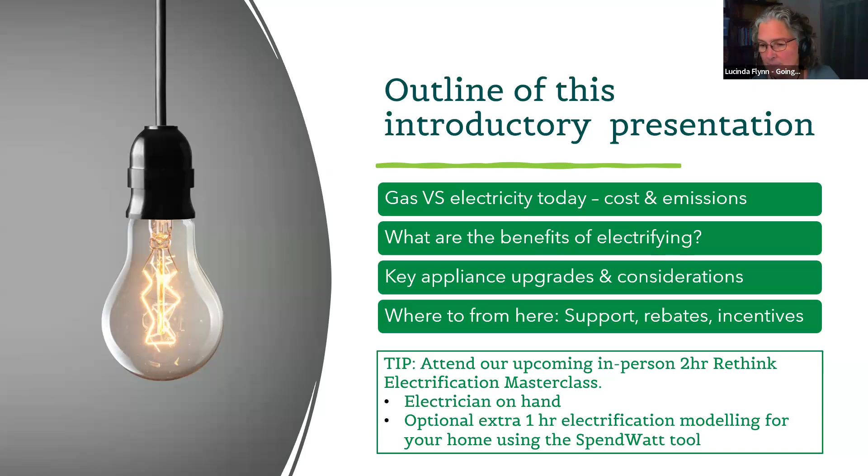All right, so cost of gas versus electricity. When I first trained to be a home energy efficiency assessor, we were actually encouraging people to take out electric things and put in gas things. So if you're confused and thinking, well, isn't gas cheaper and cleaner? Don't feel alone, because for a long time it was. So you're not wrong. It was the case, but things have changed quite a bit since then. And I'm going to try and explain briefly what has changed.

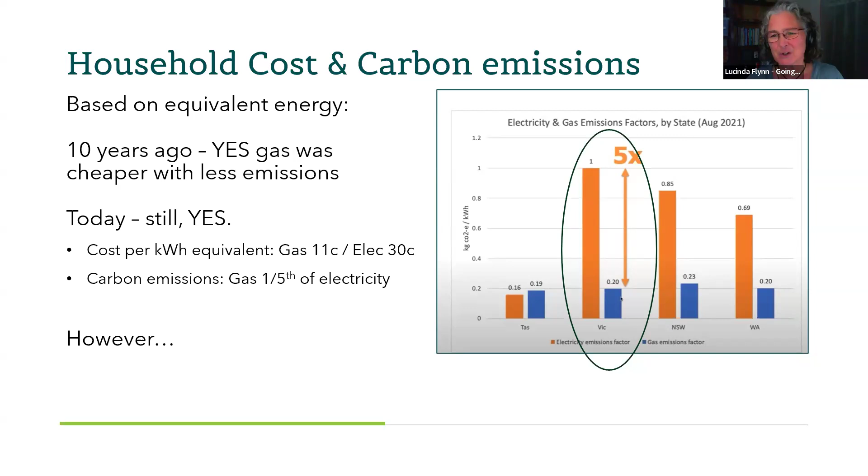So if you think about 10 years ago, yes, gas was cheaper and had less carbon emissions than now. And in one way, if you just look at the energy contained in those fuels, it's still cheaper and it still has lower emissions. If you convert them back to kilowatt hours, gas is about 11 cents, electricity 30, and for carbon emissions, that chart on the right, from 2021, shows that emissions from electricity are 5 times more than gas. So if you look at it on face value, it's hard to understand.

But there are two really big things that have changed, and one of them is heat pump technology has advanced massively. What that means is that if you use an efficient electrical heat pump appliance, it's so much more efficient at converting the energy you use into what you want from it, hot water or heat, that it changes the playing field completely, and it actually ends up cheaper and with less emissions. We'll talk a tiny bit about heat pumps here, but in much more detail at the electrification workshop.

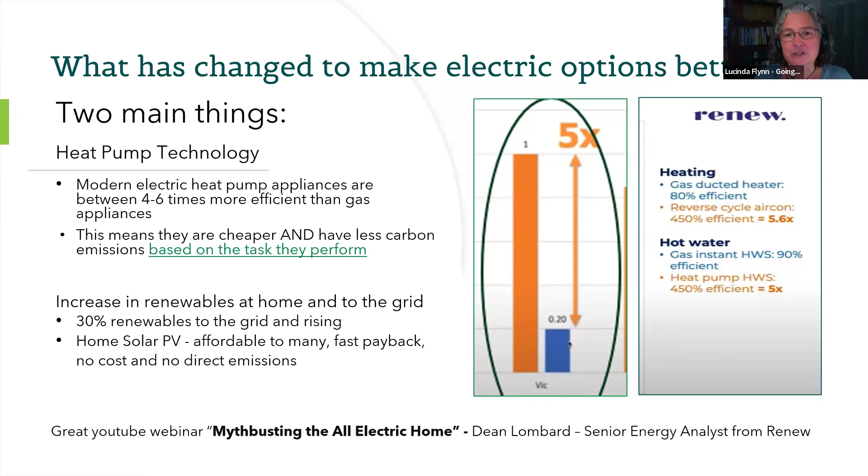The other thing that's changed is that we're getting more and more renewables in the grid, and solar power is just coming down in price all the time. It's affordable for so many people, and of course, if you can generate your own energy, it's got no cost if you're using it at the same time, and no direct emissions. So that makes a big difference in the overall picture as well.

What is a heat pump? Just briefly, it's a form of technology that instead of using energy to generate heat, it uses energy to collect free heat from the atmosphere and then move it to where we want it. And it does this with fans and refrigerant gas. And we already have some heat pumps in our homes, like fridges and freezers are heat pumps.

Sometimes people say, oh, it's new technology, and they're worried that maybe we don't really know, that it won't last the test of time. But we already have fridges and freezers. They've gotten a lot better recently, and so have all of the other kinds of heat pumps. So fridges, freezers, reverse cycle air conditioners, and heat pump hot water systems are all examples of heat pump technology.

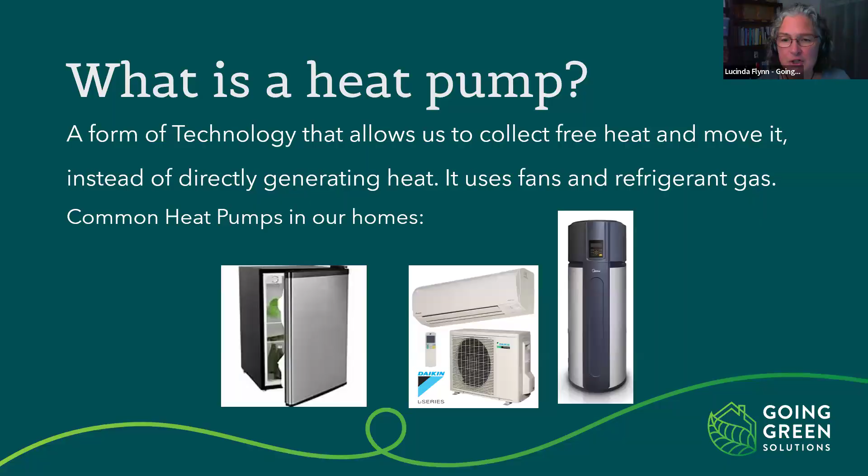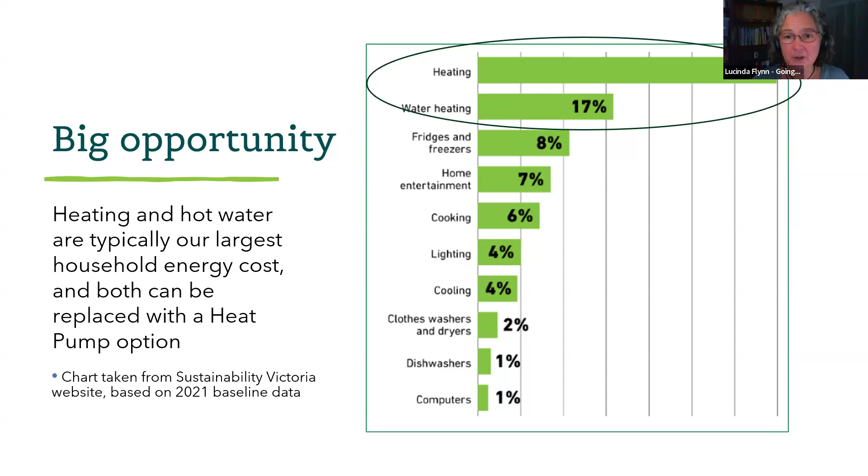And that's what makes this such a big opportunity in cost savings for our houses, because this chart shows the approximate energy use of each of these things in our houses per year, and you can see that heating and hot water together are just the biggest portion. So imagine if you can swap them over to something that's very energy efficient and you might be able to generate your own energy for. That's a really amazing opportunity.

What are the benefits then? Definitely savings. Sustainability Victoria estimates that if you convert your gas home over to an all-electric home, you'll save about $2,000 on bills a year, which is nothing to sneeze at. And if you have a solar system, you get an additional $740 of savings. And even a new home will be cheaper by not installing gas.

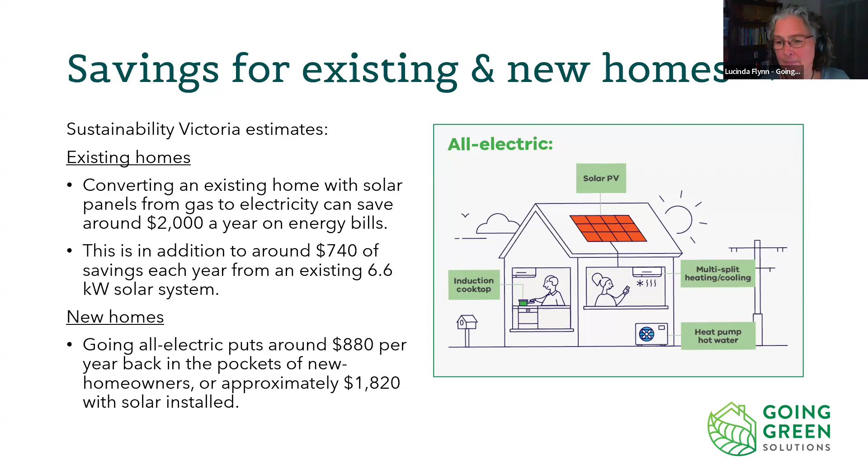Also, an aspect of it that it's only recent that we've gotten to know more is the health aspect. There are a lot of emissions that get released when we burn gas inside, and they're all respiratory irritants, and it's become known that they're actually a trigger for asthma.

If you look up Dr. Genevieve Cowie and gas inside on YouTube, she's got a great video all about it, and she says there's a similar level of risk of childhood asthma if you cook with gas as if you have a smoker in the house, which is pretty worrying. So for some people, electrifying first and foremost is about health and not burning gas inside.

And third, and important to me, is that it's one of the best ways that we as a community can have an impact on our contribution to climate change. If we could get a whole movement going and all change over to all electric, it would be the biggest impact on climate this decade, according to Saul Griffith.

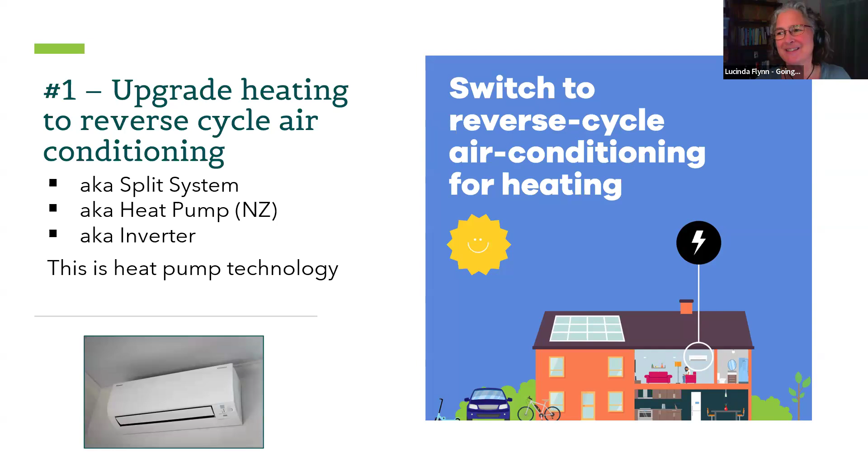So yeah, I just wanted to clear that up right at the start, because you'll hear the terms interchanged all over the place. So back to the heat pump technology.

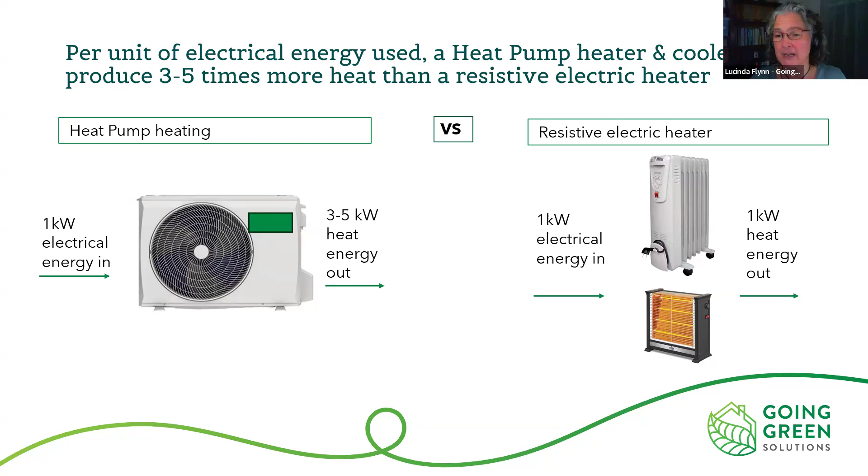There are a whole lot of things that you might be wondering about if this is something you're thinking of, which includes the kind of reverse cycle air conditioner, which could be an individual or a ducted or a multi-head. You might be wondering where to put the inside or outside units, confused about refrigerants or rebates or how big your system should be. And because this is quite a complex topic, we've got a whole separate 1-hour webinar as part of this Power Up series just about reverse cycle air conditioners.

So if this is something you're thinking about doing and you'd like to know more, then please come along to that. The whole hour is dedicated to reverse cycle air conditioners. That gives you an idea how much there is to them.

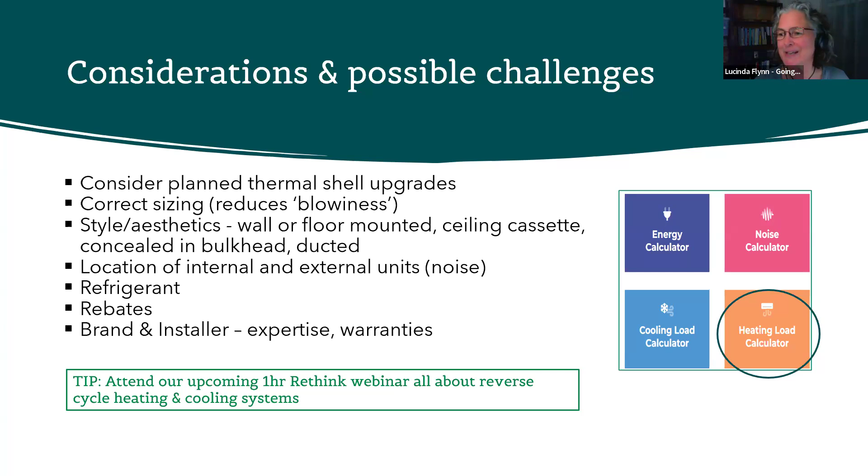There is a rebate. The Victorian Energy Upgrades Program offers rebates for all larger appliance purchases and installation, like reverse cycle air conditioners. And the rebates vary. So for an individual, it's less, 100 to 1,400, depending on how big it is and what it's replacing. The multi-head or the ducted, you get a bigger rebate, but it all depends on what your original system is, what you're installing, where you're located, although if you're in Melbourne, it's all the same, and who installs the system.

Probably the most important thing that I want to convey, though, is that when there's a really big difference in the price that you get quoted, it's not because one of them has a lot more rebates. Usually the amount of rebates is pretty similar if your original system was one thing and you're installing another thing. The difference will be in the price of the product. And so if it's more expensive, it probably means it's a higher quality product that costs more. And so when you take away the rebates, there's a bigger out-of-pocket cost.

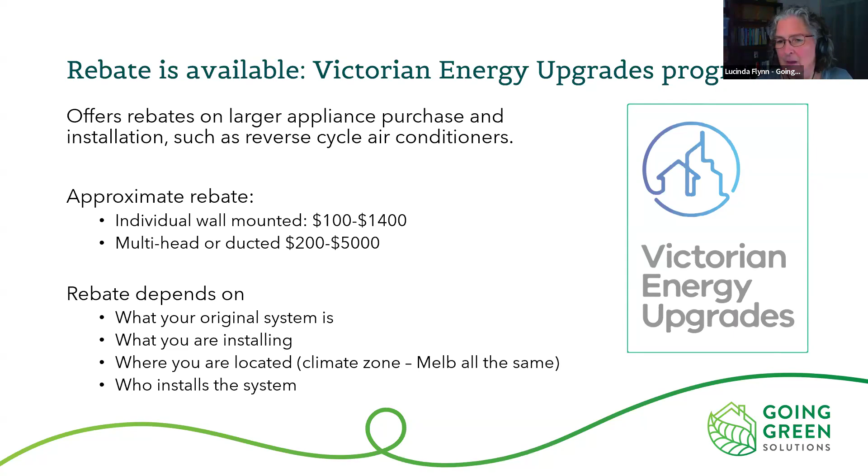Now, possibly the most common question I get asked when I do assessments is, I don't understand who can actually install a heat pump, so a reverse cycle air conditioner or a heat pump hot water system. Who can install one for me and give me the rebate? It is very confusing.

Now, just wondering if I can get a little pointer here. I don't think I can. I wish I had a pointer, but anyway.

The top right-hand side, there's a box and it says the Victorian Government Victorian Energy Upgrades Program. So under that program, the Victorian Government has certified a whole bunch of products and said, okay, for this one, we're going to give this amount of VEEC certificates. And for this one, we'll give this amount of VEEC certificates. And that's what gives the rebate value.

Now, in order to administer this whole program, they have what's called accredited providers. And those companies have to fill in a whole lot of paperwork in order to become accredited providers for the Victorian Energy Upgrades Program. And their job then is to administer and create VEEC certificates and sell them. Now, when you go to the Victorian Government site and look up who can give me a rebate, they will give you a list of all of the accredited providers.

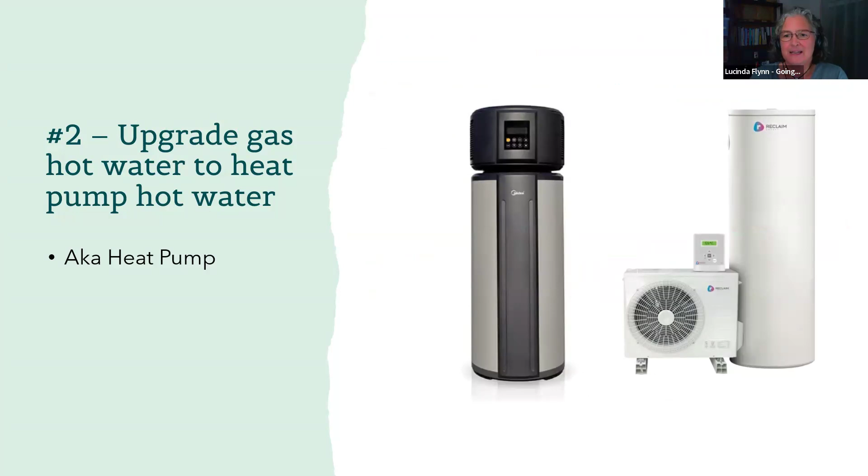And for a kilowatt of electrical energy that goes in, it will give you a kilowatt of hot water. So it's always 1 for 1 because it's directly using energy. It's heating an element which heats the water. Whereas the heat pump hot water system will take energy in and use it to pull that free heat out of the air and then output it. So usually at least 3 times the hot water out than the electrical energy in.

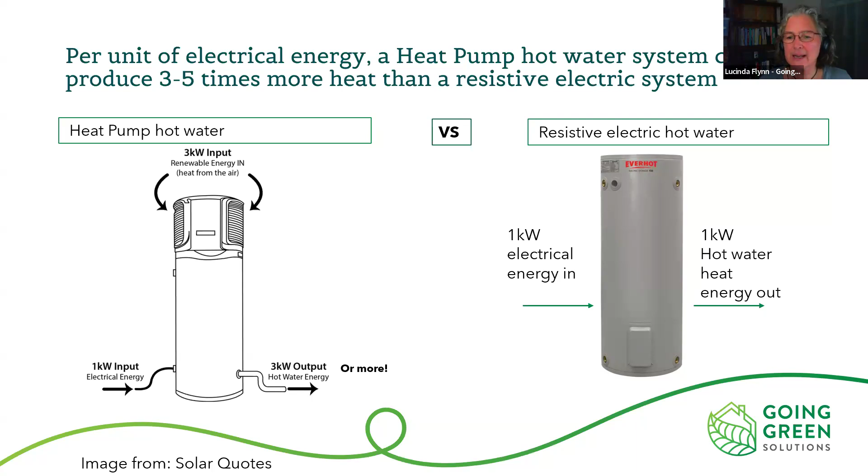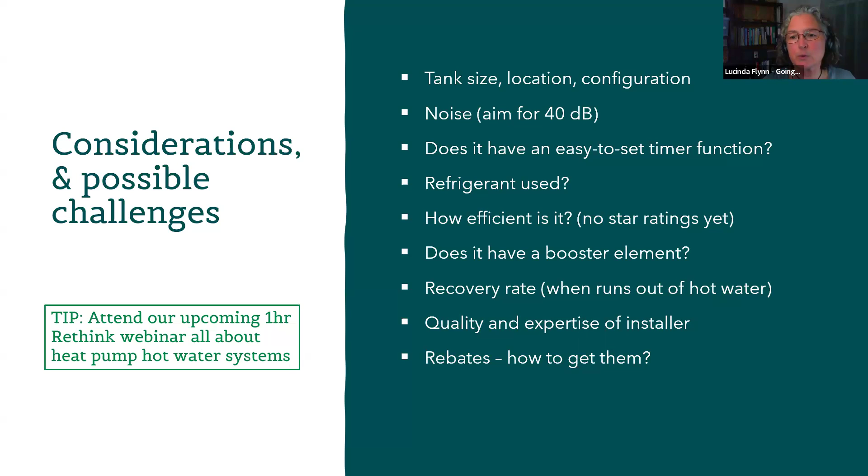Again, refrigerant or how efficient it is. Can you time it so that you can get it to heat when you're generating solar electricity? And the rebates again. So there's a bunch of stuff, and we'll go through that in a lot more detail and have lots of time for questions at that webinar. There are rebates in this case, as well as the Victorian Energy Efficiency Certificates, the state one. You also get a federal government rebate called an STC, and most people will be able to get the Solar Vic rebate as well, which is an additional $1,000.

With the Solar Vic rebate, if you've used that rebate to get solar panels, then you automatically get that $1,000 because you can get both. It didn't used to be like that. It used to be one or the other, but they've changed it. Just like the reverse cycle air conditioners, it depends what your system is that you're taking out, what you're putting in, where you're located, and who's installing it.

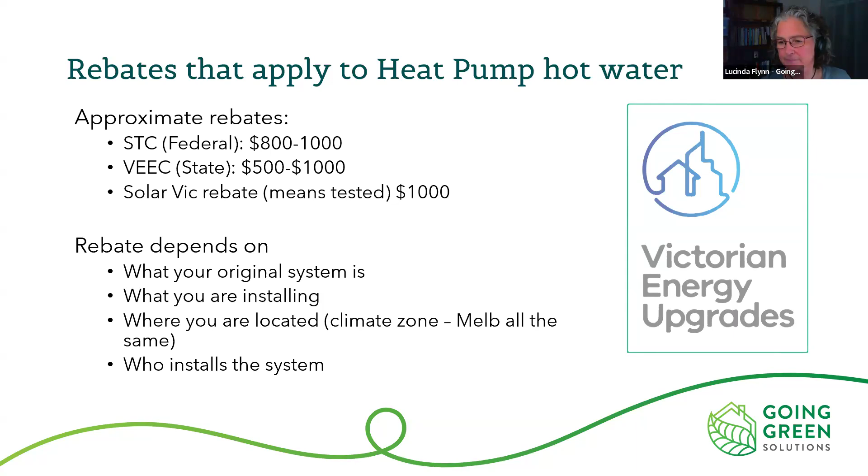An induction cooktop doesn't have an element and it doesn't heat the cooktop, it heats the pot that's on the cooktop. Look, any kind of cooktop is not going to use that much energy, so if you already have an electric one, great. And then if it breaks, you can upgrade to induction, and I must say it's a much better kind of cooking experience. So that might be a reason to do it as well.

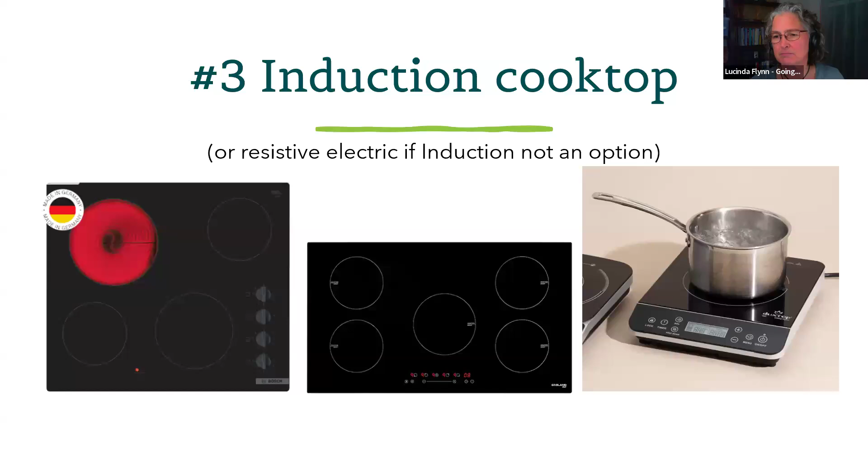There's a few things to think of. There's lots of benefits. They're really fast and very responsive. So when you turn them down, it's really instant. They're a lot safer because they're not heating the cooktop, and they're easier to clean because it's not heating up.

A lot of people worry about their cookware and if they're going to have to replace it all, but honestly, a lot of cookware is compatible. All you need to do is get a fridge magnet and stick it on the bottom of your cookware, and if it sticks, then it's compatible. And I think when we changed over, out of all our pots and pans, there was about 4 or 5 that we needed to get rid of. So that was easy. Another one that can catch people out is what sort of bench top they have. If you have a laminate bench top, it's no...

Yeah. There's no issues on another tab. I'm going to try to... Kirsten, if you could mute. Oh, that's great. Yep.

What was I saying? A laminate bench top is fine, but if you happen to have a stone bench top or a marble bench top, that can sometimes cause a hiccup because there's new rules, I think, about cutting them. But I do know of a stone cutter that can cut out your bench top if you need. So feel free to ask me for details about that. Sometimes you do need to have a separate circuit on your switchboard for the induction cooktop, so you'll need to have a talk to an electrician as well. And there is a rebate of about $200. It's fairly new. It's not heaps, but it helps.

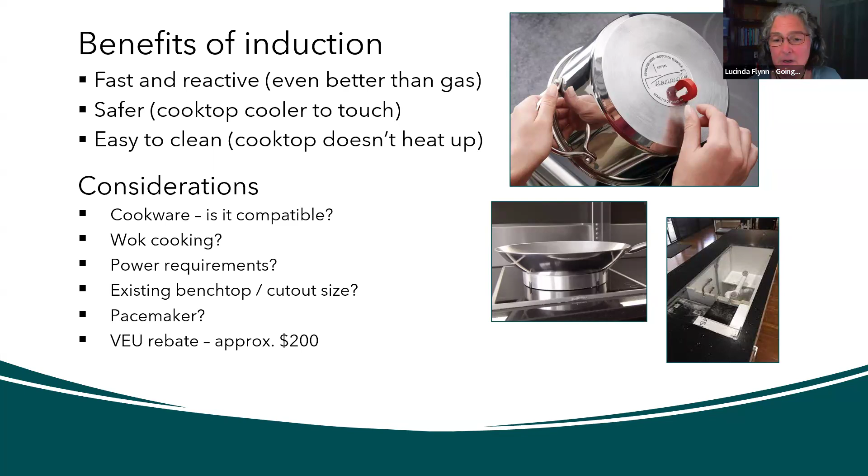All right, along with those 3 appliances, ideally what you want to do is try and get rooftop solar as well. And hey, if you can get an electric vehicle, even better. So starting with electric vehicles, the other picture I showed you showed that we use a lot of energy for heating and hot water, but that's inside the house. Outside the house, petrol cars are often our biggest use of fossil fuels. So being able to swap that is a really big opportunity.

And there is a webinar being presented by Clean Energy Nillumbik with Bryce Gatton. He's sort of an electric car specialist. And that will be fantastic. If you've wondered about electric cars, that will be a good opportunity to learn stuff and ask him questions.

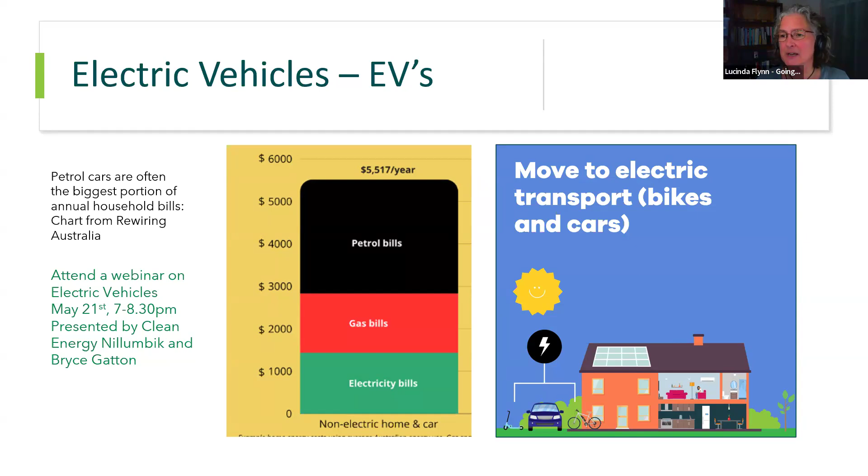There are a bunch of considerations. I know we got one recently and it was quite stressful, wondering about charging and even charging at home. I didn't really understand it all. In the end, we're just charging from an extension cord from a power point and it's totally fine. So that's pretty much how we charge our car 95% of the time. And you can get yourself a bit organised before you go out on a longer trip by downloading some of the apps for the recharge stations, because you generally can't use them without an app or a card.

So there's a few things like that, but I think once we actually got it, it was a lot easier than I imagined it would be. It's just a change in thinking. And yeah, that point there that you've got to rethink the way you refuel is very true. It's more like putting your phone on to charge overnight, if you're going to do it from home, that is. But some of the fast chargers, you can plug your car in and fill up your car in 10 minutes. It's crazy.

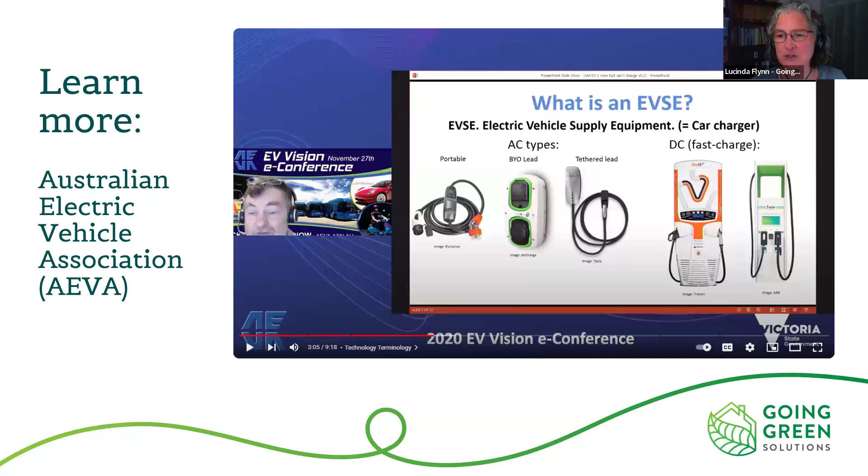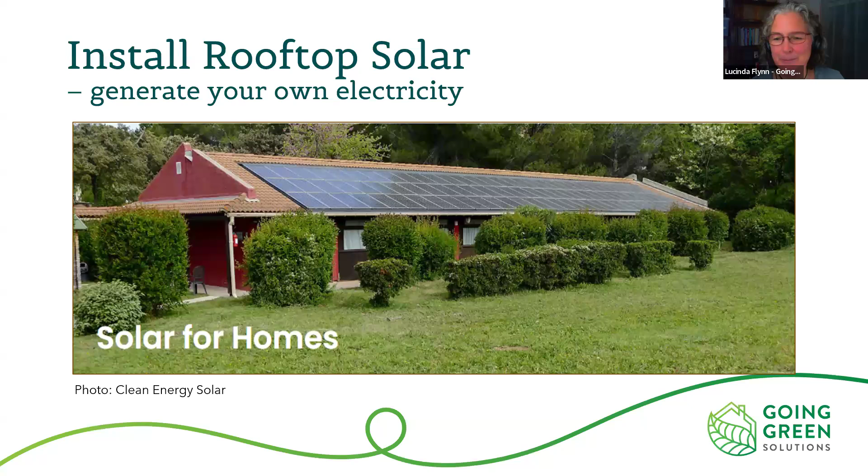Cost and payback for solar is almost always worth it. Because we're in Nillumbik, it's more likely we might have shading issues. I know that at our house we do have loss in our panels from shading. So that's something to consider, but these days they've got so many good ways around that, that unless you've got really a lot of shading, it's probably still going to be worthwhile. There are good rebates as well. So the SolarVic rebate is about $1,400, and on top of that, you can have an additional interest-free loan of $1,400, and there are STCs, the federal rebate that goes on top of that.

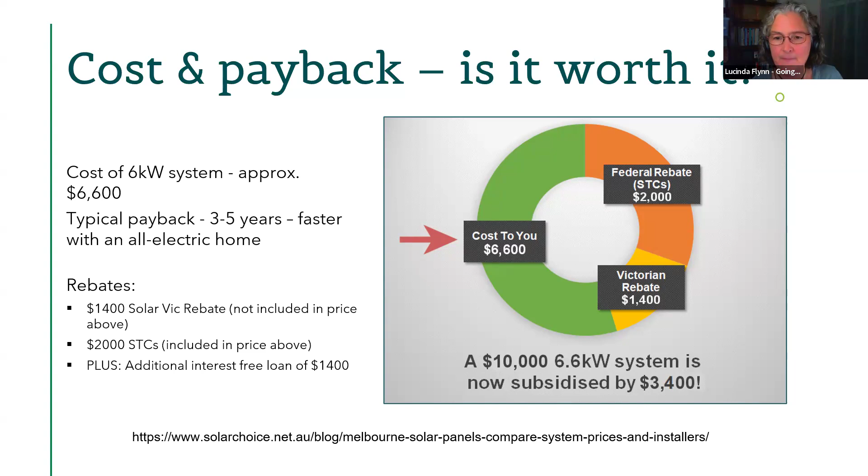Battery storage: for years, me and other assessors have been saying, hopefully in a few years the price will come down and it'll be financially beneficial. It's still sort of even, but the scenario is changing for a few reasons. One is that our feed-in tariff keeps going down, which makes battery storage more viable financially. The other thing is there is a SolarVic interest-free loan of $8,800 towards battery storage. You pay it back over 4 years. It is means tested, and you've got to have a 5 kilowatt or more system, but that makes it a lot more affordable.

And the other thing is we are in an area that has blackouts. In Hurstbridge, we've had a blackout that lasted about 10 days a couple of years ago, and the only person that could charge anything was our friend who had a solar system with battery that was wired so that it was still working when there was a blackout. So there's other reasons why you might do it.

Another big change that's coming is that electric cars will be more and more capable of bidirectional charging. What that means is that you can plug your car into the inverter so that you can charge up your car while you're generating energy. And then at night time, your car is still plugged into the house, and you can run your house off it. And that's a really enticing prospect, because electric cars usually have a battery of at least 40 kilowatts. And these days you can get batteries of 100 kilowatts. So imagine having that much energy on call for a fraction of what it would cost you to put that much standalone battery storage in your house.

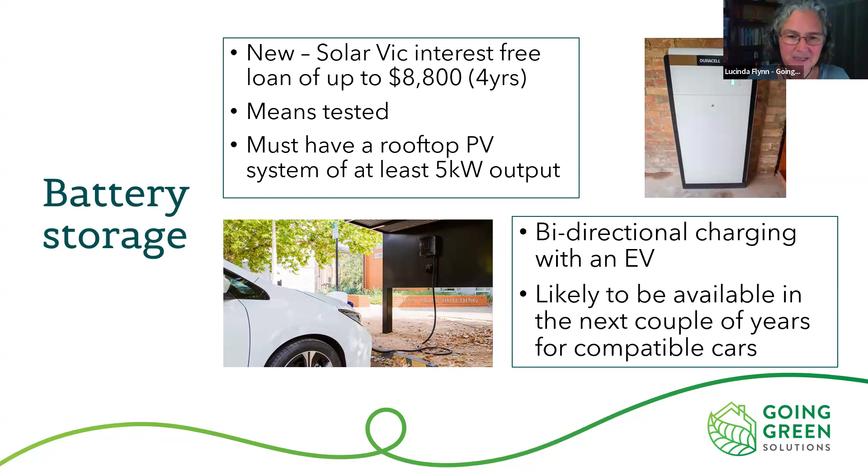I believe that late last year or early this year, the government has okayed bidirectional charging; the manufacturers have now been given the green light, but they're now working out what products to bring to market. So it's still a little while, but it won't be too long at all.

Now, so far, we've talked about a lot of things that have to do with appliances and big stuff that you buy. But I really want you to remember that there are 3 aspects to energy efficiency, and all of them are equally important. So the first one is the building shell, which is about just what surrounds us, what separates us inside from outside. It's our windows, insulation, drafts. And so it's really important to get things right there as well.

You might choose a really efficient reverse cycle air conditioner, but if your building shell is as leaky as a sieve and you've got no insulation and all of that stuff, first of all, it's going to be really trying hard to keep up the amount of heat that you need to be comfortable. And also it's going to cost you a lot because you'll just be running it on full steam the whole time.

So building shell stuff is really important, and we do have a couple of deep dive webinars on it: we've got one on draft proofing and one on window upgrades. So if you're interested in that, they're really good ones to go to. There are a lot of window upgrades that people don't think about that are a lot lower cost than swapping to double glazing.

And then the third aspect that's also equally important is your behavioural use of your house and of your appliances. Even without changing one appliance or any of your building shell, there are ways you can use your house efficiently and less efficiently. So ideally, you want to pay attention to all of these three things and make them all work together.

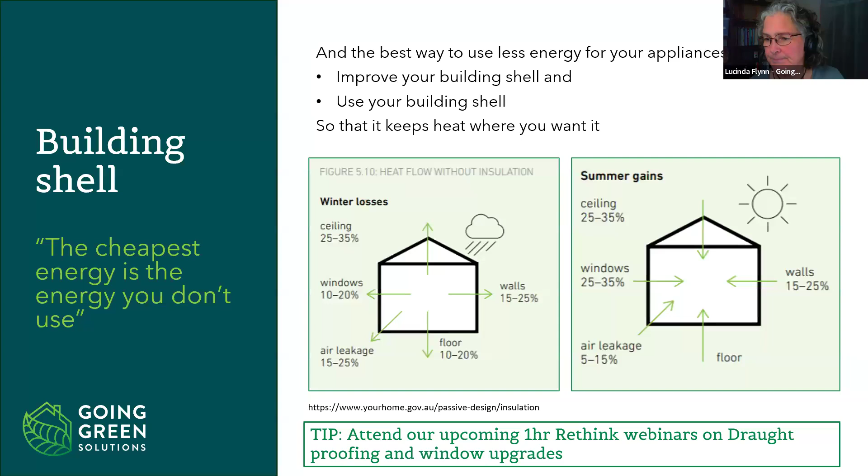So planning your journey. There are lots and lots of resources you can use. And so I'll talk you through how you might do it just on your own, DIY. First thing you would want to look at is go back to the start. What are your motivations? Is it that you want to save money, in which case swap gas heating probably? Is it because of health? Well, make sure there's no gas space heating in the house or cooktops. If it's environment, then it'd probably be heating again because it's got the biggest impact.

But as well as the motivations, you also want to just have a think about what challenges and barriers there might be for you. So, for example, a really common thing that I come up against when I make suggestions is someone says, well, I'm open to the idea of individual reverse cycle air conditioners, but my partner hates them and they won't have them on the wall. So if that's the case, you've got to figure out how important that is. Can they be talked around? If they can't, then what are some other options? But it's useful to know that in advance.

The other thing is people often don't like curtains. They're really thermally efficient, but if you don't like them, it's good to know that in advance so you can look for other options. There could be other things like I already mentioned, shading on the roof that might make solar difficult, or you might think that your roof is going to need replacing, which means that you might rejig the way that you do things. Or you might say, once we move out of this house, it's probably going to get knocked down so they can build units. Well, unless you think you've got another 10 years in there, it might make it less viable to do bigger things like blow-in wall insulation, for example.

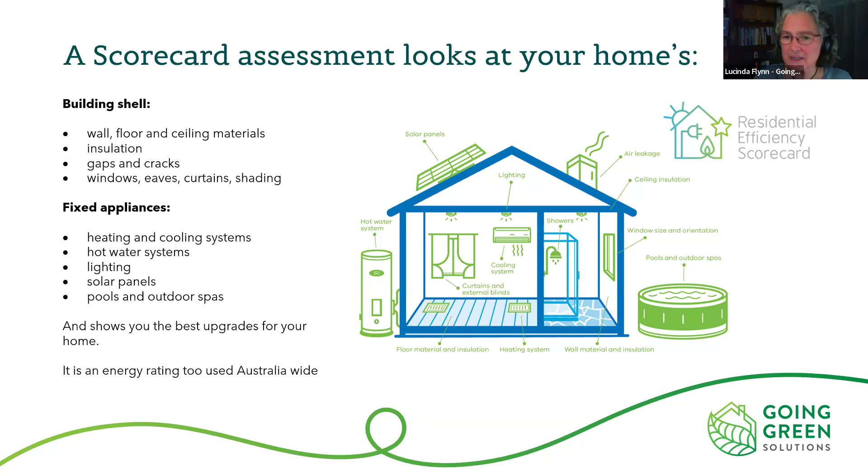And because they've actually been in your house, it's easier for them to give you advice because they've seen it and they've talked to you about how you use it and how it works. They can see how old the appliances are and whether there's leaks or whether there's issues. So that's one other option.

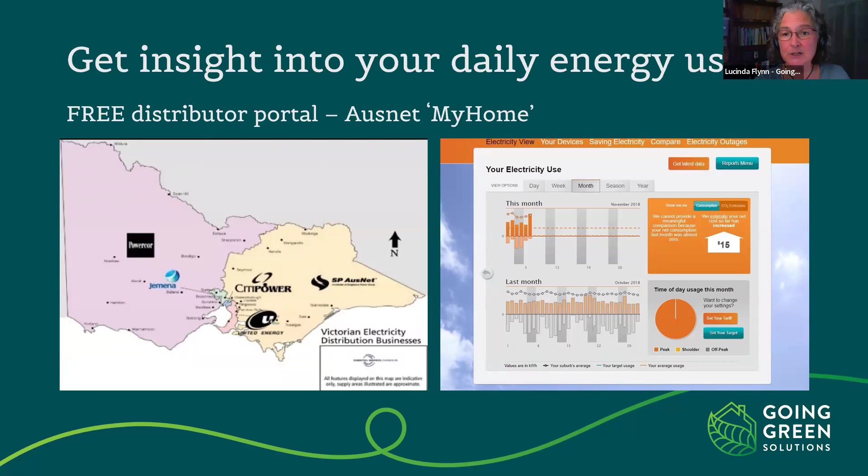There are also other great resources. You can look at your own household energy use by going to the AusNet My Home distributor portal. You just create a free account and you can look at your energy use data. You can get the same sort of information by getting a free in-home energy monitor installed. That's free under the Victorian Energy Upgrade Scheme, and it shows you your usage across the day. So it's a good way to figure out what's using energy.

It's not for everyone. It seems to really suit people that like to keep on top of it and, you know, check every day about what's going on. So for some people, that's a fantastic resource. You can compare your gas and electricity rates, and it is worth doing that, especially after the rate rises in January and July, just to make sure you're paying a reasonable amount.

There's a bunch of financial assistance if you happen to be low income or on a concession card, and you'll be able to get a copy of these notes. So I won't talk any more about that now. You can look it up afterwards. And there are also bank and home loan incentives. And I actually just met someone today who is a mortgage broker that specialises in green home loans.

So she can organise a home loan that gets you a discount off your mortgage for like the next 5 years, and it can be between like 30 and 60,000 off the mortgage over its life, which is pretty impressive. And Scorecard is one of the tools you can do that with. That's the professional assessment I just mentioned. There's also fantastic general information on the Your Home Guide and the Sustainability Victoria.